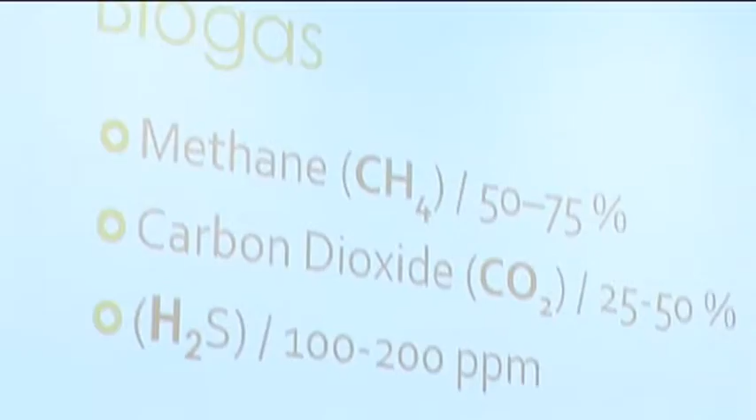So I will briefly describe the process of biogas production, as some of you might not be familiar with it. Biogas is produced through anaerobic fermentation of organic matter, and the end product is methane gas, which depending on the substrate consists of about 50 to 75% methane. The rest is basically carbon dioxide and a little bit of H2S. This product is either burnt in a cogeneration plant to produce electric and thermal energy, or is purified and used as a natural gas in the national grid. This is not yet in Bulgaria. It's very popular in Germany, but not here yet.

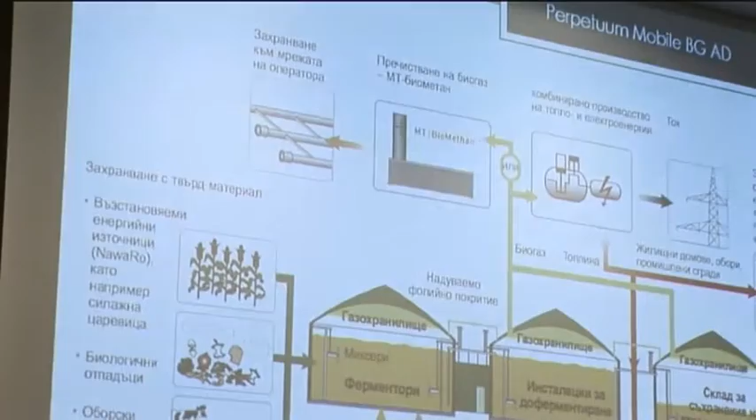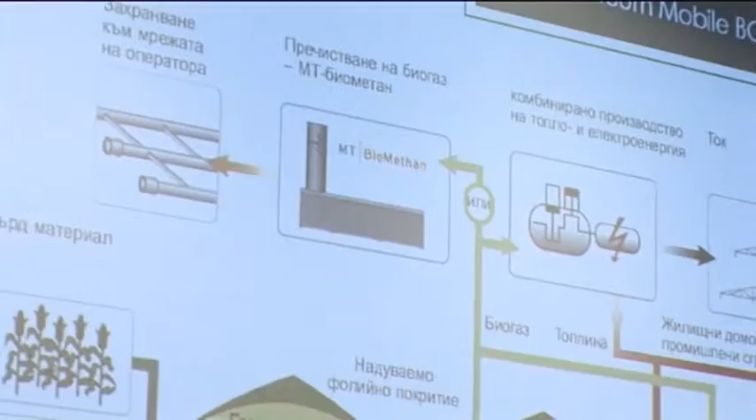Very briefly, once again, the whole process goes through digesters. The fermentation starts in the first digester, where the bacteria decompose the organic matter. Then it goes to a process of secondary fermentation, and the end product of the organic matter is actually organic fertilizer, which goes back to the fields where we got the original produce for the substrate.

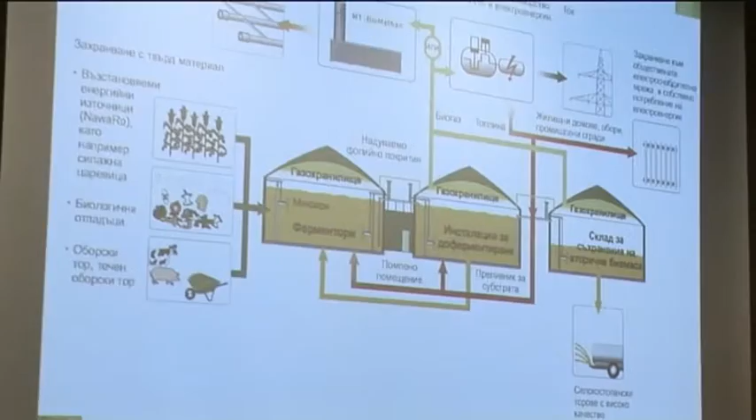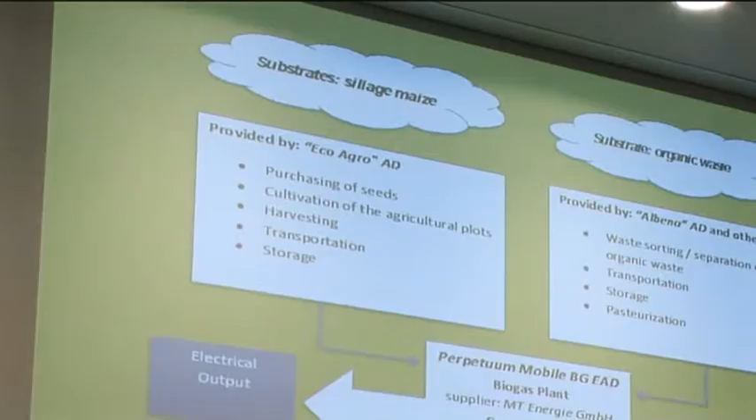I will not get into too many details, but this is something that I would like to keep your attention on. This is how we actually started with the idea of the biogas plant, because Albena, most of all, is a touristic company, and investing into renewable energy is something new for the company itself. Many of you might think that with the renewable energy plant, we directly guaranteed some of the energy supplies for the company, but we decided to indirectly guarantee some of the other produce which is necessary for the resort.

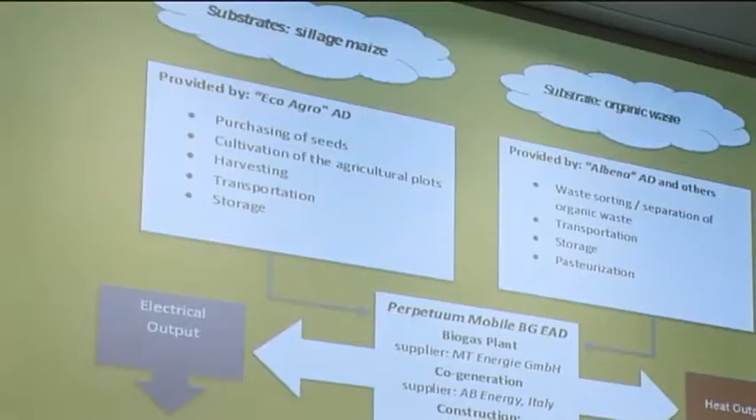With building the biogas plant, we are actually consuming some of the agricultural produce which we are producing, and the end energy on the heat side we are putting back into producing vegetables and fruits which are used in the resort, which is very important for our guests, because we can guarantee fresh and quality produce in the resort. And the other end product, which is the organic fertilizer, we also use in agriculture to supply this fresh and quality produce.

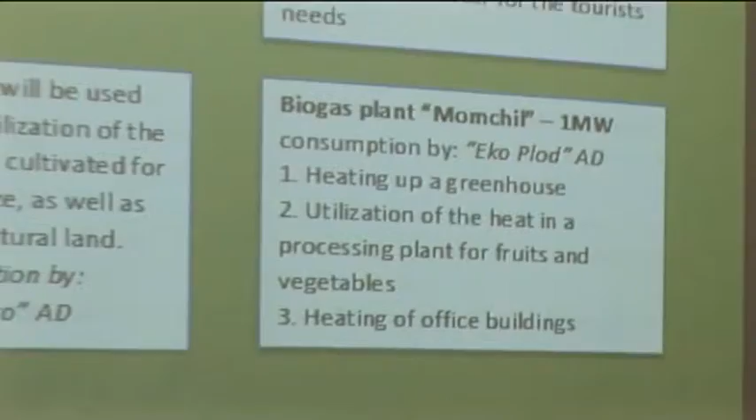There are actually two plants on the screen, as you can see on the bottom right. The first one, called Momchil, is the one we already built, and the second one, which is in the planning process, is near the resort. And the idea for the second plant is to supply the resort with heat energy and to extend the touristic season, which is something very important for Bulgaria. As some of you know, we have a short summer season, and each week or each month we can add to the season is very important for us.

So our idea is to implement the heat energy in the resort, to heat up the hotels, and maybe in the near future, why not have some heated open-air swimming pools, which will be fantastic for our guests. So this is something coming up in the next couple of years.

As I told you, the first stage of the biogas plant, which was already built, is 1 megawatt electrical energy and 1 megawatt thermal energy. We're also planning an extension with half a megawatt more, which should be coming in the next couple of years as well.

Just a few words about the construction process. As I told you, this was something very new for the country, for Bulgaria, and it took us some real effort to go through it. The construction itself continued for about 6 to 8 months, and the main participants were a construction company which undertook the civil works, the biogas technology supplier, which was a German company, and the cogeneration supplier, which was an Italian company. So thanks to all three of them, we had our plant completed.

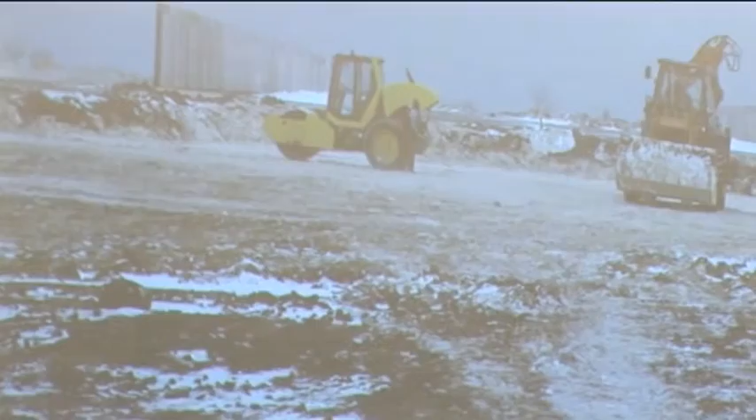And I've decided to put some pictures. This is how it looked before we did any construction. This was the site in the very beginning. This is how we started. It was winter time. It was very tough. This is December. We had lots of snow, but anyway, the construction went on.

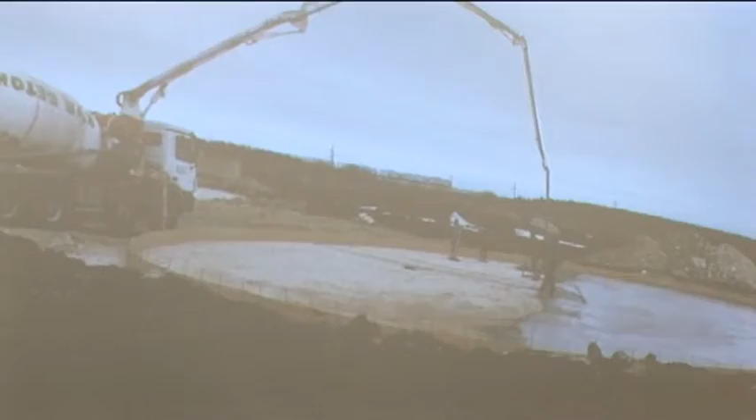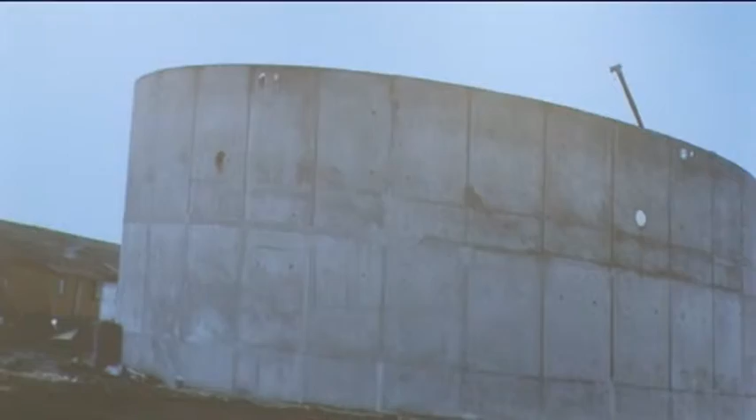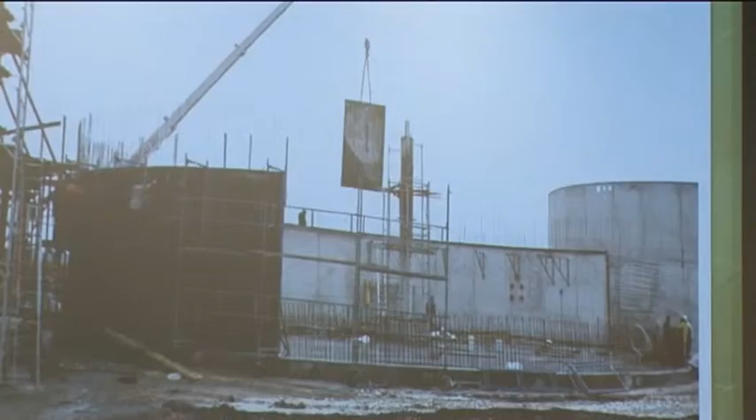These are just the first parts of the digesters being built throughout the whole winter. This is digester one already completed. This is how it looks. Now it looks much better, actually. These are the 3 digesters already completed.

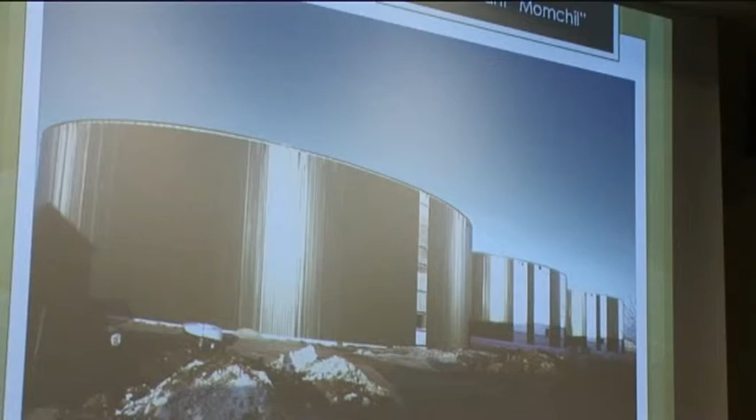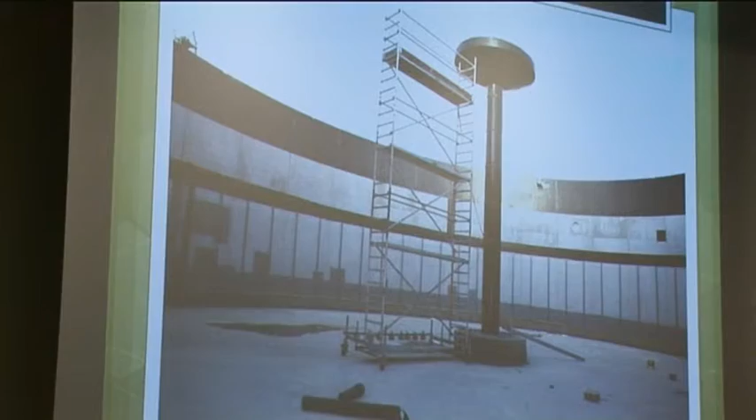As I told you, the biogas technology was supplied by one of the biggest German companies. It's a trusted partner, MT Energy. Maybe some of you have already heard of this company. This is how the digesters look with some cladding on. Now it's impossible to have a look inside as they're full with substrate which is fermenting.

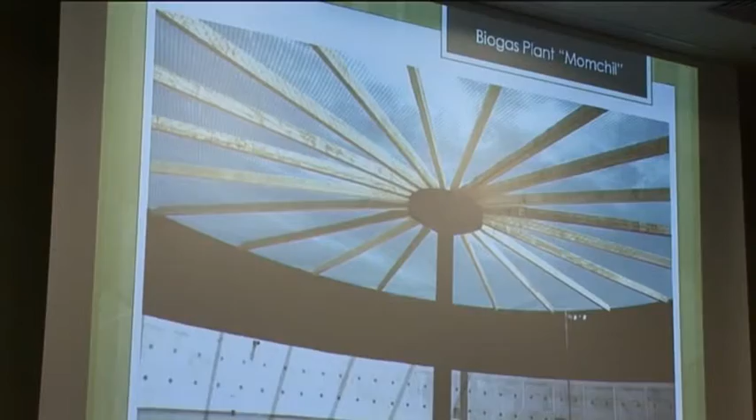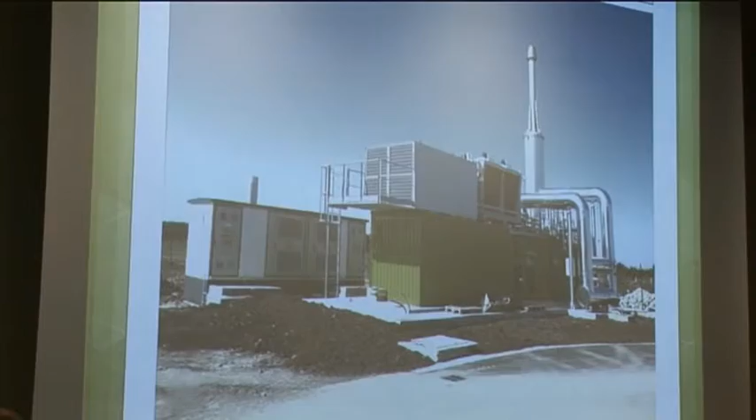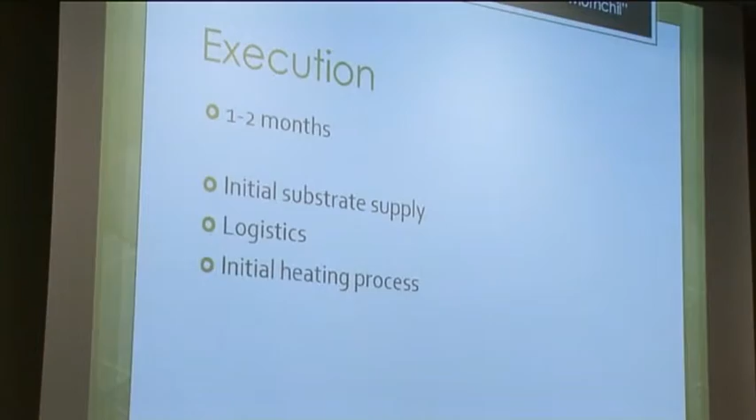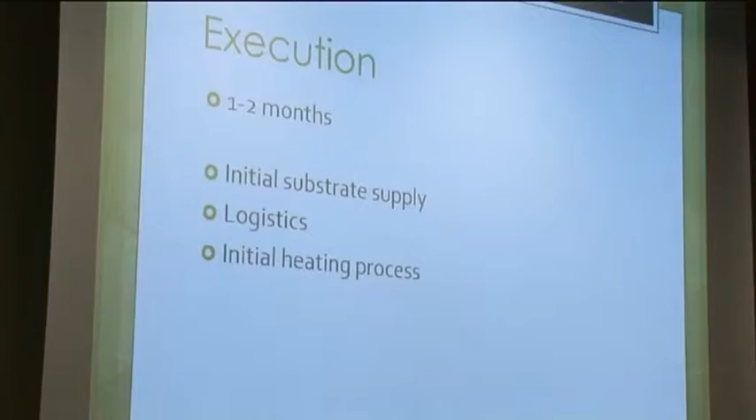And also a few words about the starting process. Usually in countries which already have a few biogas plants built, they take substrates from one another, so it's easier to start up a new biogas plant. But in our case, as we were the first one in Bulgaria, our startup process was a little bit more complicated. We had to collect manure from nearby cow farms, heat it up, and increase the number of bacteria in the substrate itself. So this took another couple of months.

This was the initial feeding of the fermenters with manure. And this is how it looks now. This is the completed plant. Since August 2013, it's in operation, and it's been working with full power so far.

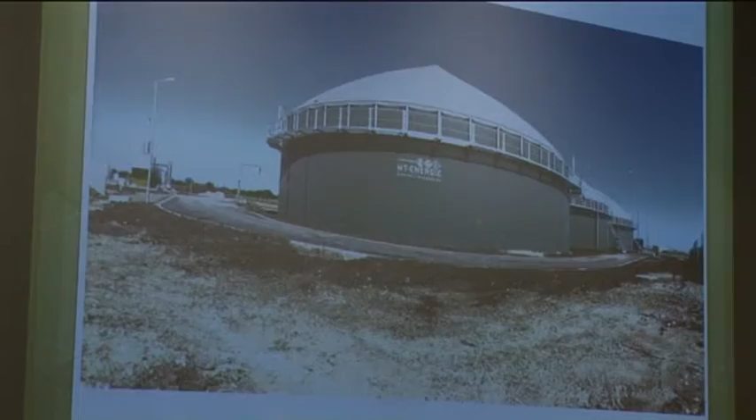Now, I would like to say a few more words about the future project that we have. I know this was incorporated in the demo, for which we were awarded by the GB Factory, and it's something that we would like to build near Albena. It's the second plant, which is also planned to be 1 megawatt electrical and 1 megawatt thermal energy. We don't have so many photos or designs yet, but I'll be able to show you the main idea.

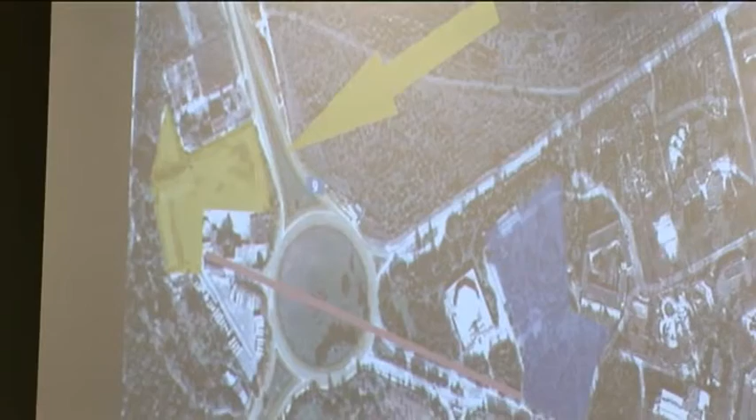This is where we are now in the resort of Albena. The area marked with yellow is the site that we are planning for the second biogas plant. It's just near the resort, as you can see. The blue area is a new aqua park that we are building. You've all passed by it on the way to the hotel. You've seen it's a huge construction site, and it will be a magnificent aqua park.

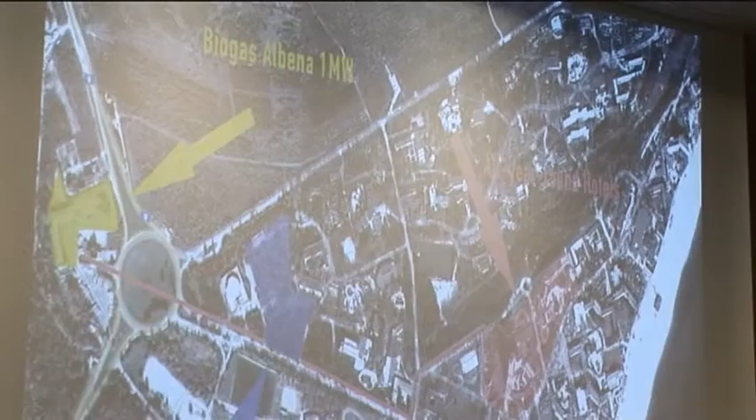And part of the heat energy we are planning to use in the aqua park to heat up the swimming pools and the water used in the slides, so that the aqua park could be operational from April, for example. Why not? When the outside temperature is about 15 to 20 degrees, people will be able to use the water in the aqua park.

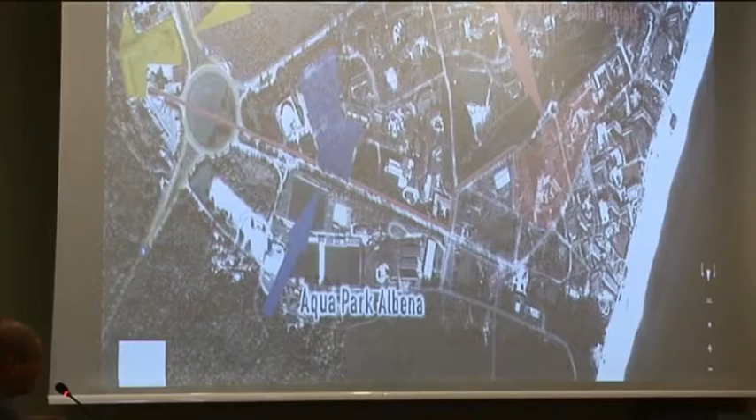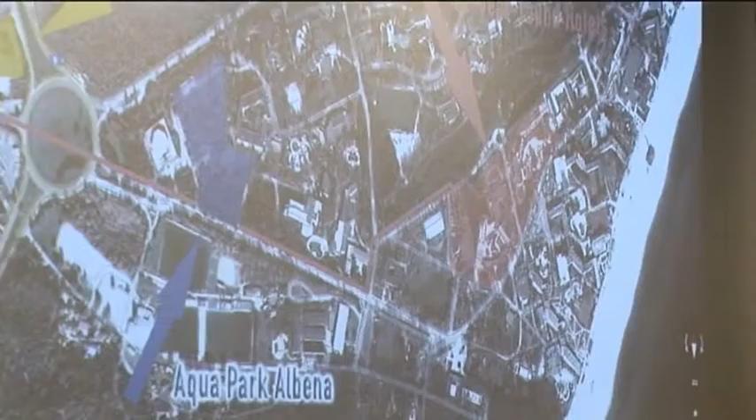And also part of the heat energy we will supply to the area marked in red, which is the hotel that we are in right now, and the nearby hotel that the resort is planning to have operational year-round, which will be basically a revolution in the resort. At the moment it's impossible to heat up with electrical energy. It's very costly. So this will change the whole face of the resort once it's built.

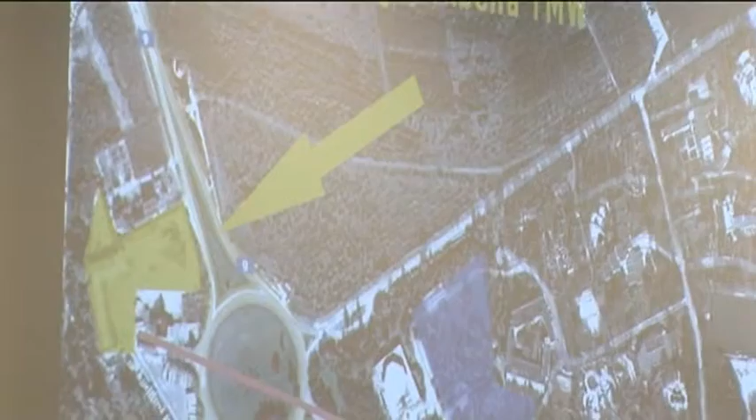This is just a small design layout of how it will look. And yeah, basically that's all. And I have a short video to play as well.

Yeah, I know about the awarding. I would like to use this brief moment to thank all of the members of the GB Factory project, and thank you for the award, as I wasn't able to be present at the awarding. It was an honor for us to receive this award. It's part of the EU strategy, part of the EU policy, and we're very glad that we became one of the companies in Bulgaria to receive this award. Thank you.